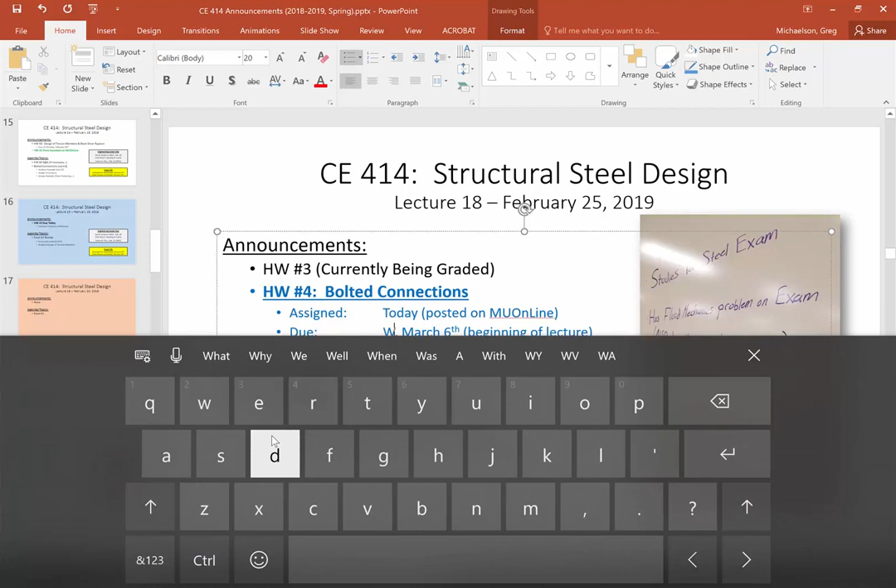Is it not? Did I do it again? It's more, is it a Wednesday? I'm sorry. See, now I don't have my keyboard hooked up, so now I got to do this thing. Okay, and I know that some of it fed through. See, I go in and I just change the date, but then it says Wednesday. Maybe I should just remove the day so that I'm not causing too many errors. But it is due on March 6th, so that is true.

Okay, so you all have a homework assignment, homework number 4, bolted connections. That's been uploaded today, it's due on March the 6th. After today, you should be able to handle most of it. The only thing that's going to be a little new is the combined loading problem. But if we don't get to it today, we're definitely going to get to it Wednesday. There's no reason you can't address number 1 and probably number 2. There are 3 problems, and number 1 and number 2 you should definitely be able to address by the end of business today. So yeah, everybody good?

What? Oh, thank you, I didn't know what you were talking about. Okay, thank you, that's awesome.

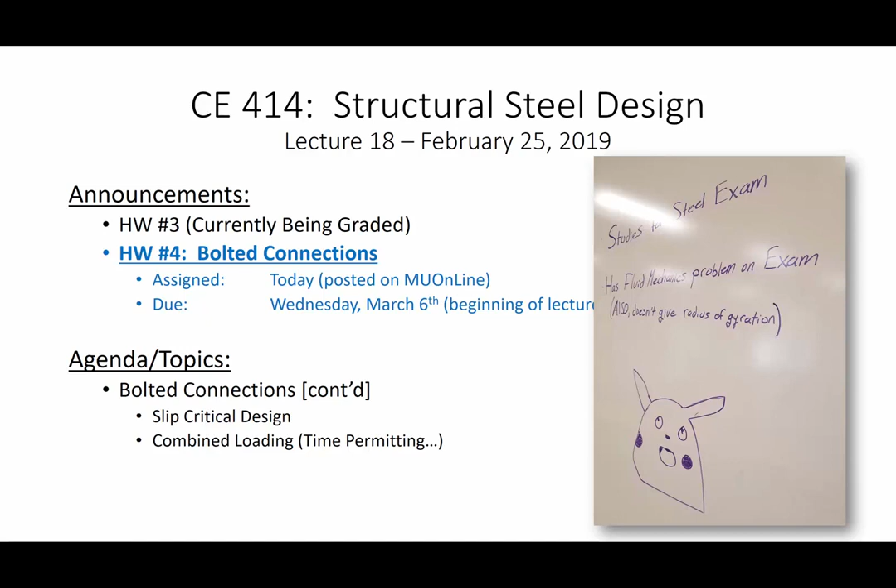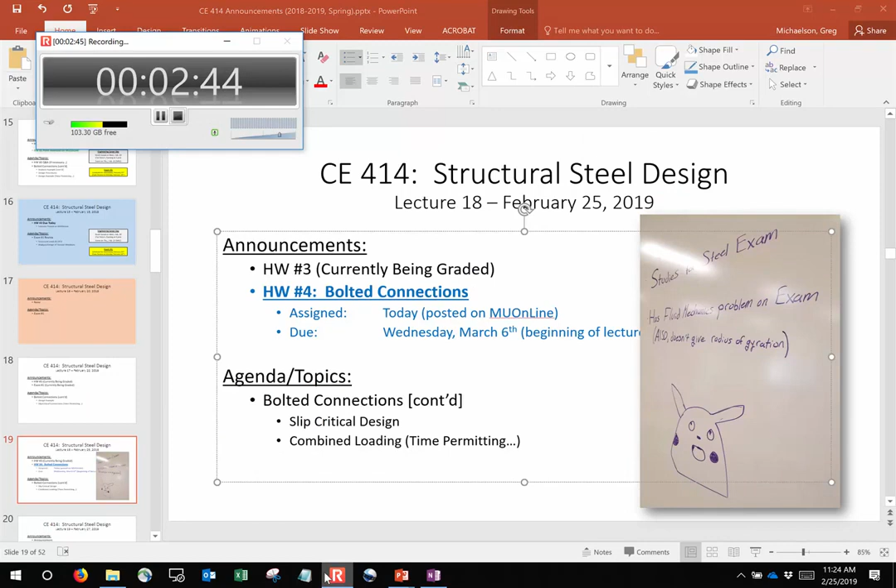So let's go back to bolted connections, and let's get back into the swing of things. Is this thing still recording? Yes, it is. I was like, why is it only recording for 2 minutes? Oh yeah, because I didn't record any of the exam solution.

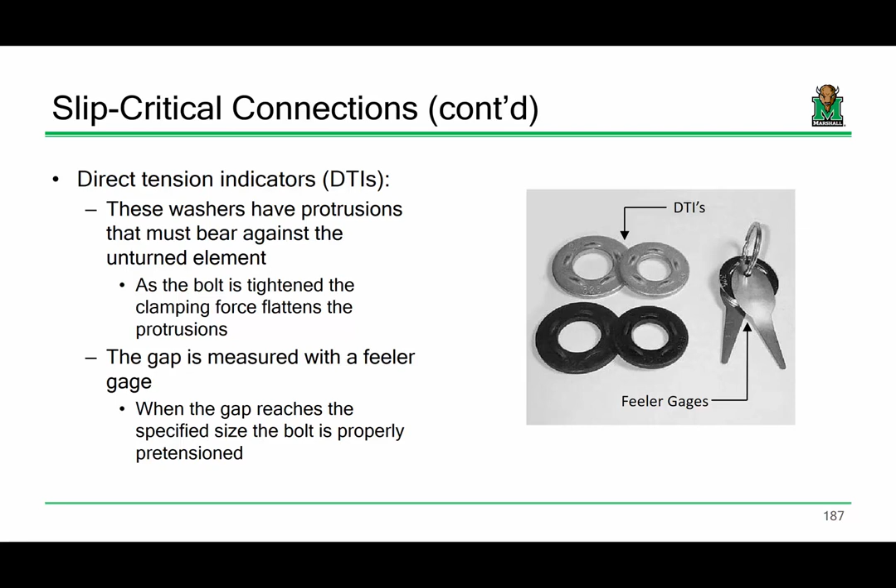All right, let me go back a few slides to make sure everybody's clear on this. So the last thing we talked about was the difference between a bearing type connection and a slip critical connection. A bearing type connection is subjected to the requirements of bolt shear capacity, or it must meet the requirements of bolt shear and bolt bearing. So if you have load on it, those are the 2 limit states that you need to withstand, and that ultimately guides how you design. We determine the design load, determine the shear capacity of a single bolt, divide to obtain the number of bolts, lay it out according to spacing and edge distance requirements, and then check bolt bearing. Now, let's be absolutely clear, I'm not going to make you check gross section yielding, net section fracture, block shear rupture, any of that, although theoretically, whenever you're designing a connection in tension, there are all those other limit states you need to check.

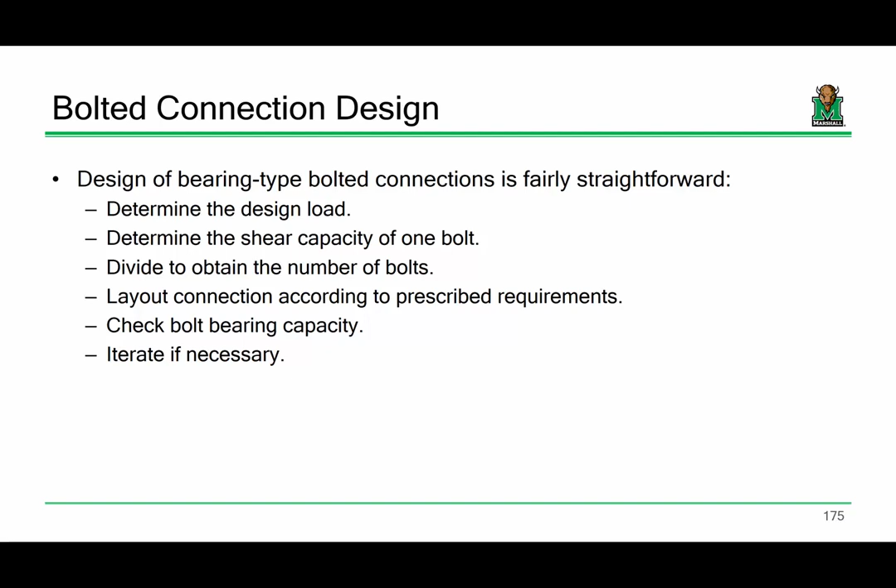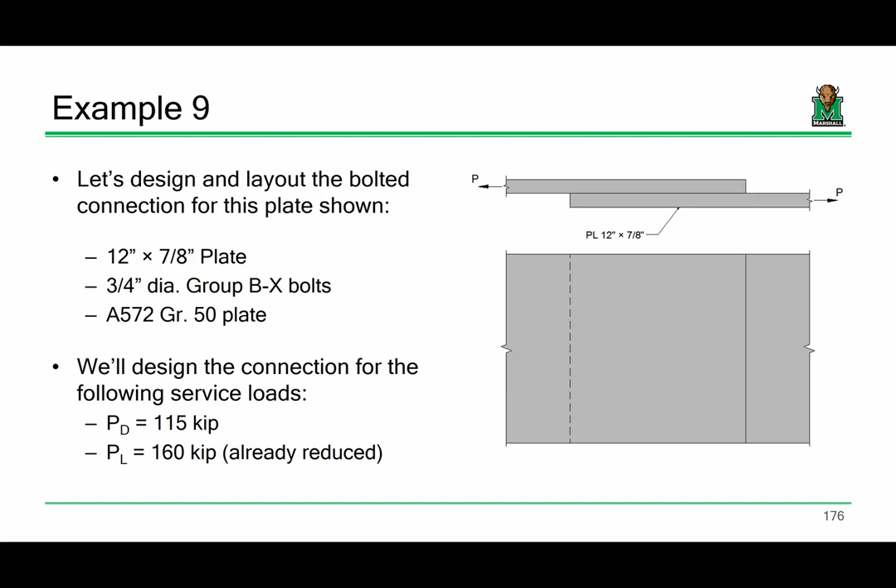We did this problem together, and I think we got, what was it, like 18? How many bolts? Was it 18 bolts? 15 bolts. Okay, so we got 15 bolts on this connection. We laid it out in a 5x3 pattern, used 2-inch spacing along the plate and 1-inch edge distance spacing. Yeah, it was 2 and 1. We didn't do the bolt bearing check, but you all have enough ammunition to do that on your own.

And we talked about additional issues, and then we got into slip critical land. Slip critical connections are when we're using enough pre-tension on the bolts that we can actually count on the friction developed between the 2 faying surfaces for the strength of the connection. There are specific locations where we do that, where we have vibratory loads, where we have fatigue considerations, and it's not uncommon to detail connections that way in earthquake zones. So all bridges use slip critical connections, so it's a very fundamental type of bolted connection.

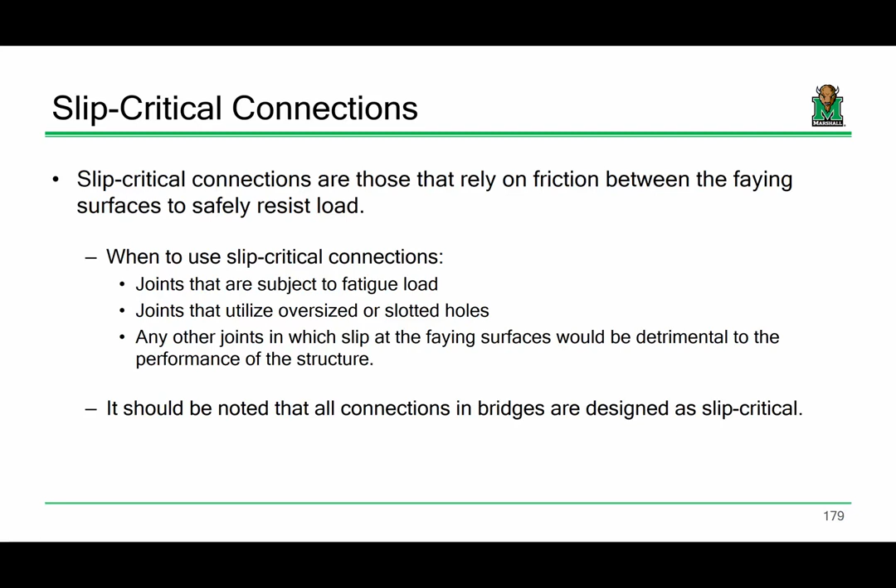Slip critical connections have to meet the requirements of bolt shear, bolt bearing, and this new slip resistance. We went through all these different ways in which you can achieve a slip critical connection. I'm not going to go through all of them again since we've done it before.

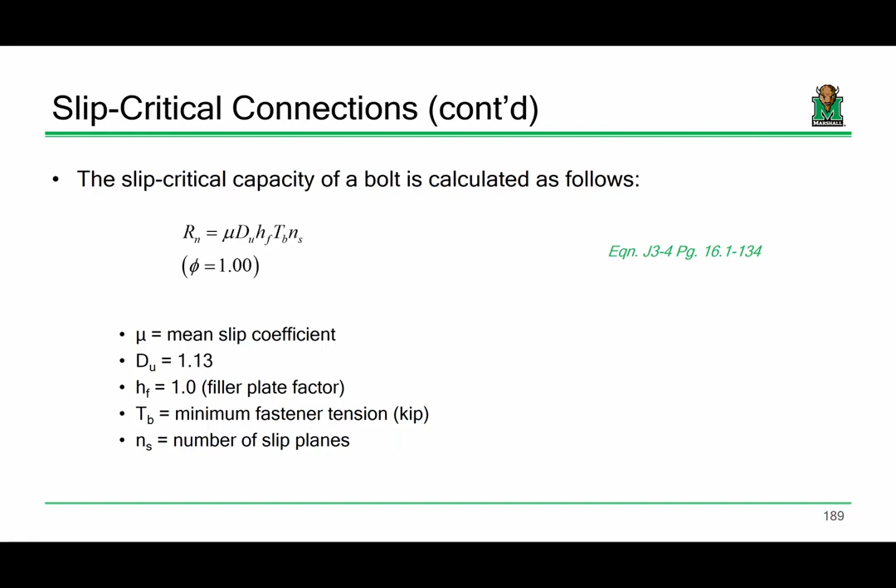You take mu and you multiply it by T sub B. T sub B is essentially your normal force, that's how much tension you're developing inside your bolt. So mu times T sub B, that's the physics side of it. The D sub U, the H sub F, and all that, those are all the adjustments for reality.

So mu, that's a lookup, 0.3 for Class A, 0.5 for Class B. The difference between the two is basically a reflection of the surface characteristics. If you have blast clean steel, you develop better friction between the two plates, whereas normal everyday steel, a mu of 0.3 is expected.

D sub U is that multiplier that reflects the actual pretension you get versus what you specify. On average, you get more pretension in the field than what you actually specify, so it should give you some comfort that those prescribed methods like turn of the nut and using a DTI or twist-off control bolts are all very valid means to generate specified pretension, because you usually get that and then some, since that value is over 1.

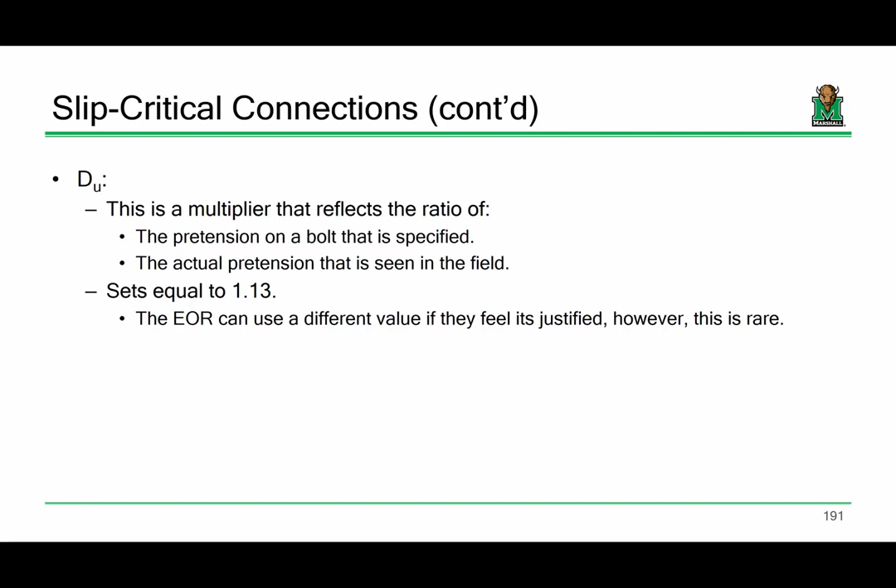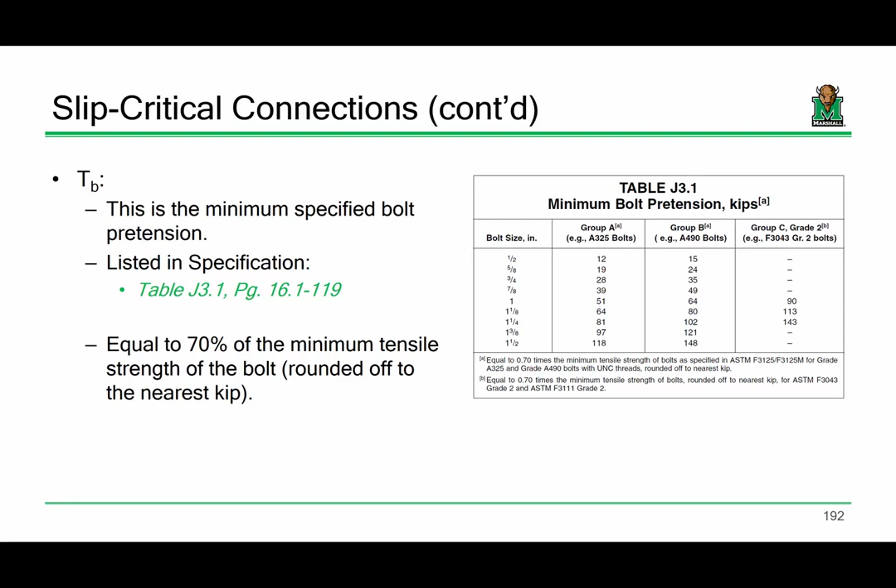The engineer of record can specify a different value if they want, but that almost always never happens. T sub B, that's the actual minimum pretension force that you get. It's roughly equal to about 70% of the minimum tensile strength of the bolt, just rounded off to the nearest kip.

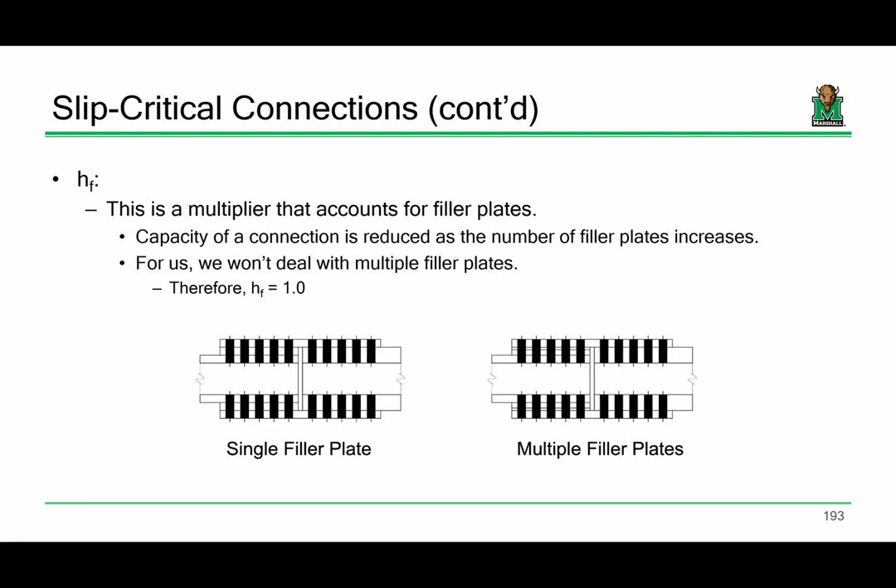The filler plate factor, that's if you're splicing beam A to beam B and you have multiple filler plates to try and even out that thickness. But we never really have to worry about that for the purposes of what we're doing in this course. And N sub S, that's just the number of slip planes. If you had multiple slip planes, you could double your capacity, but it's basically the same thing as the number of shear planes - the number of faying surfaces, or the number of locations where you can develop that slip capacity.

The big thing I want everybody to be clear about is that all of these parameters, just like bolt shear capacity, are in here. So if you turn to Table 7-1, that's the table that lists the capacity of each bolt, right? Because everybody brought their AISC 15th edition steel construction manual, that turquoise book I see on everybody's desk.

Yeah. Oh, there we go, there we go. I didn't know you were looking for it. Never mind, I apologize.

Everybody has their AISC 15th edition steel construction manual, right? So if you turn to table 7.1, it lists the shear capacity, available shear strength of a bolt. Just turn the page, and you'll see table 7.3, which has the slip critical capacity.

Now, if you look at how this is organized, the page on the left is group A bolts, the page on the right is group B bolts. Now, you can turn the page and there's a group C bolt, but we're never going to use group C in this course, so you don't have to worry about that.

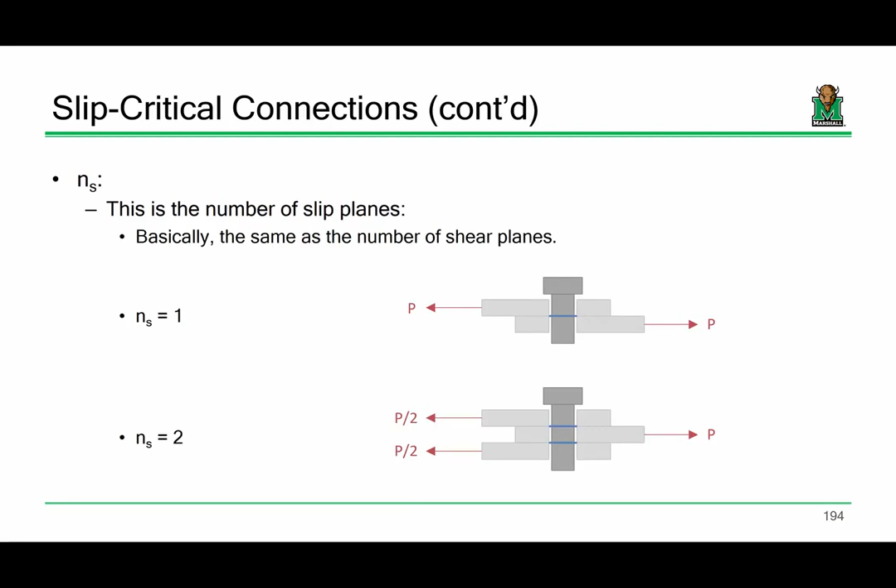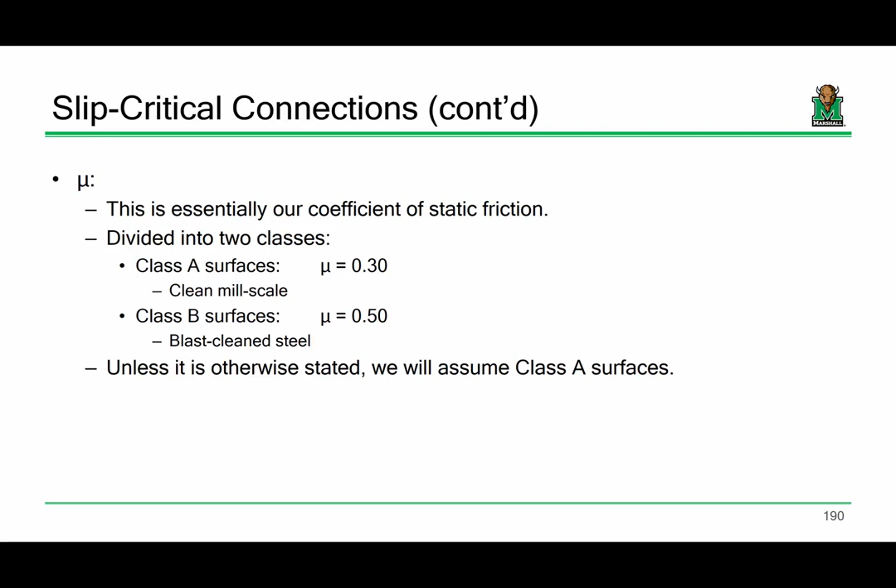Basically, larger hole diameters mean you develop less friction, so less friction means a weaker bolt. You can see that pattern if you look at the bolt holes—as the bolt holes get bigger, the bolt capacities get smaller.

But you really don't have to do much in terms of capacity calculation. It's very similar to bolt shear—all you have to do is say here's my bolt diameter, I'm looking at a Group A bolt, it's 3/4 inch in diameter, it's single shear, and bam, there's my capacity. It's a pretty straightforward lookup—there's really not a whole lot to it.

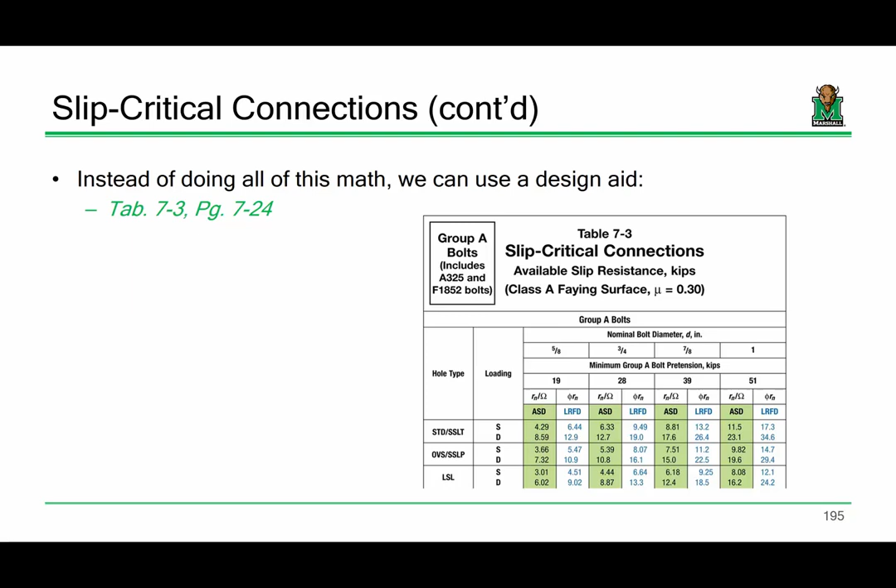I want to exercise that using the following example. I want to design this connection, but I'm not going to go full out into it because this example is going to be really short. Now, to be absolutely clear, it would probably be a lot longer on your homework assignment since you'd have to look at your bolt layout requirements, edge distance requirements, and spacing. I'm not going to get into all that. I just want to make sure you're comfortable looking up the value here—that's really all this example is about.

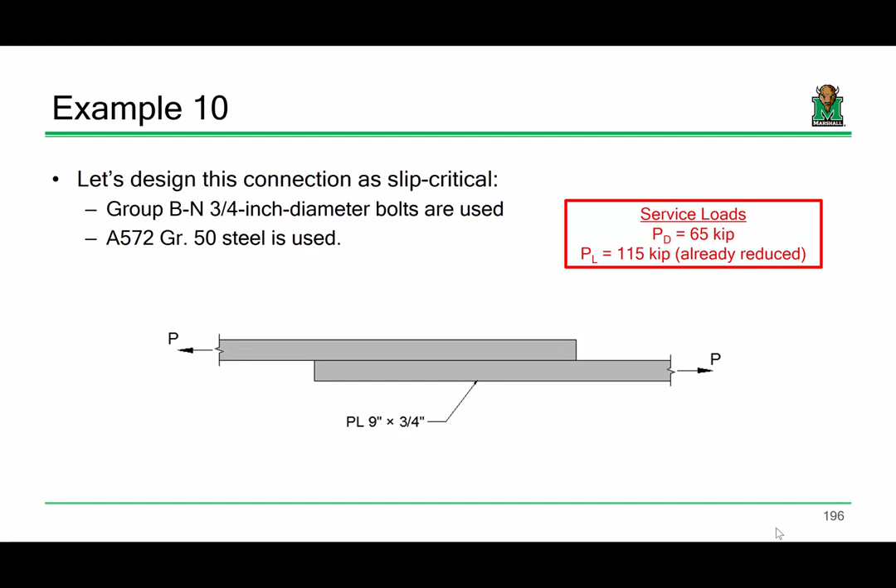So we have a Group B 3/4 inch diameter bolt with A572 grade 50, although that's really not going to matter for the purposes of what we're talking about here. What we need to do is determine how many bolts we're going to use. I'll show you something about this example as we get into it, and I think you'll see what I mean.

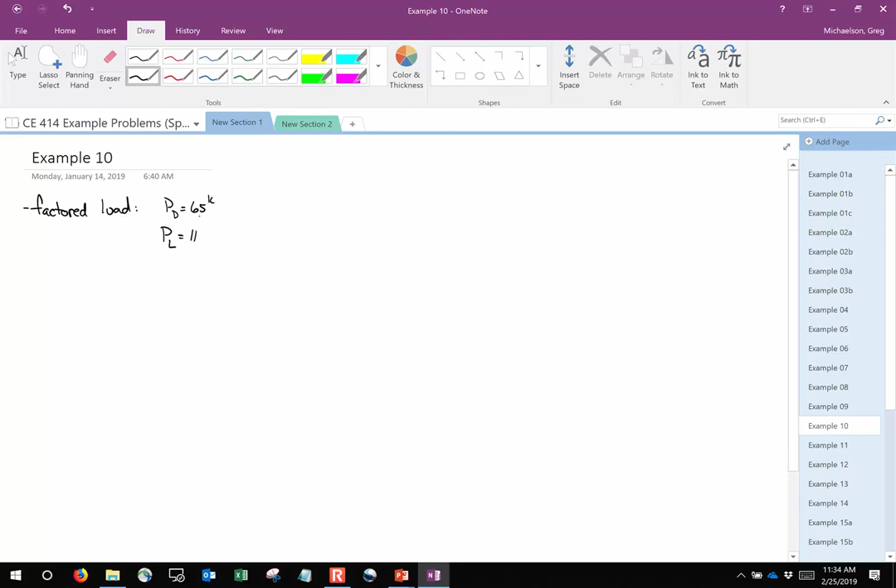Okay, so first off, if we're in design land, what do you think is the first step we need to do? We need to factor the load—so let's determine a factored load. We have a dead load of 65 kips and a live load of 115. So that's 1.2 dead plus 1.6 live.

All right, hold on. 262 kips—do I have a second on that? Somebody said no? Okay, yeah, well, it's possible. Remember, I can't stress this enough—on an exam, second-guess yourself. Do the math, and do it again. Guarantee you, averages will go up. Guaranteed.

All right, now in terms of design, here's sort of how this works. The first thing I'm going to do is look up bolt shear capacity. Just because this is a slip-critical connection does not mean we don't have to worry about bolt shear—we most certainly do. See, if the slip fails, the connection automatically becomes a bolt bearing connection, because if that friction fails, those bolts engage, and so we still have to meet the requirements of bolt shear and bolt bearing.

So let's talk about these bolts. What's the deal with the group—is it Group A or Group B? So it's Group B—and then is it excluded or included? If I didn't tell you whether it was included or excluded, what would you do? Assume they're included, because threads included inside the shear plane mean a weaker connection. Always assume the worst case scenario.

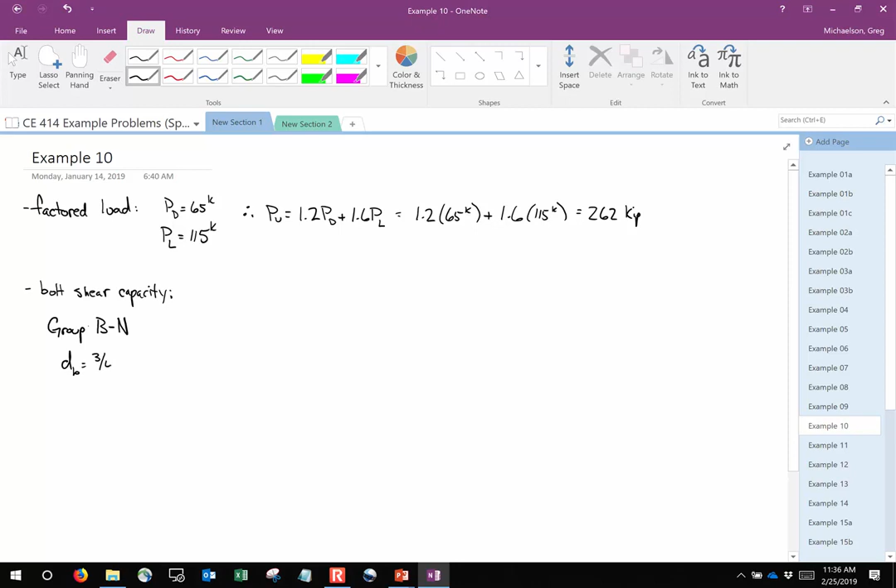What is the bolt diameter? And what about the shear—are we in a single shear scenario or a double shear scenario? Single shear. So help me out: if we're talking about the shear capacity of a bolt, I'll indicate that as phi Rn V, with a little V to indicate shear. What would the shear capacity of a bolt be? 22.5 kips per bolt. Is everybody else able to find that?

Well, somebody, where did you find that? Somebody tell me.

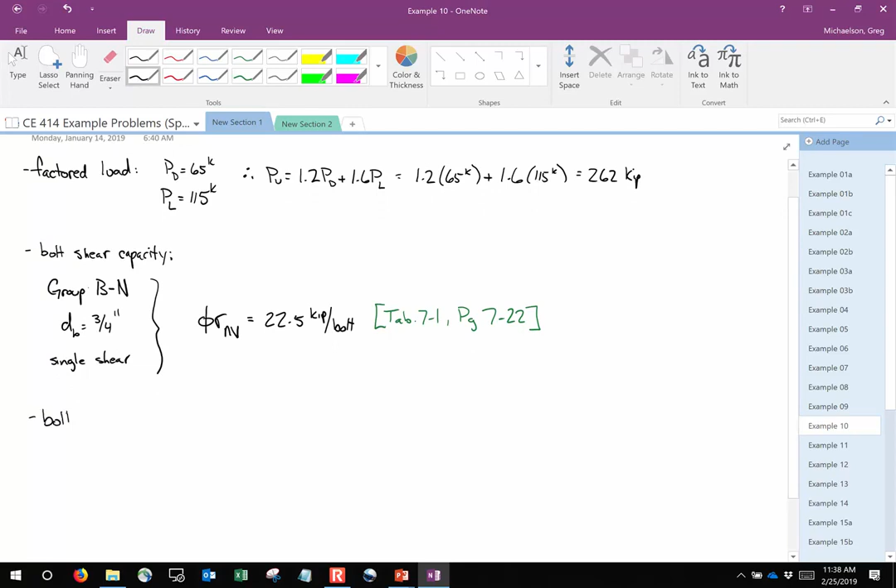Okay, let's start listing the parameters associated with bolt slip that are going to be important. We can turn to table 7-3 and start writing down the things that matter. So first off, what's the deal with the groups? Are we in group A or group B? B, so we have group B.

What about the threads being included? Does that matter? It doesn't matter, okay, because we're not talking about shear, we're talking about slip. So whether the threads are going to be sheared through or not doesn't matter if we're not talking about shear.

Now, we do still have a bolt diameter of 3/4 of an inch, okay. We're dealing with a standard hole. I'll go ahead and put that, although we pretty much are always going to be dealing with a standard hole.

What about our faying surface? Do we know what faying surface we have for this problem? We don't. So if you don't know, what are you going to do? What's the most conservative assumption? Well, no, that's the bolt group. Yes, so we're always going to assume—so maybe what I'll do is put that in red and say: assume class A.

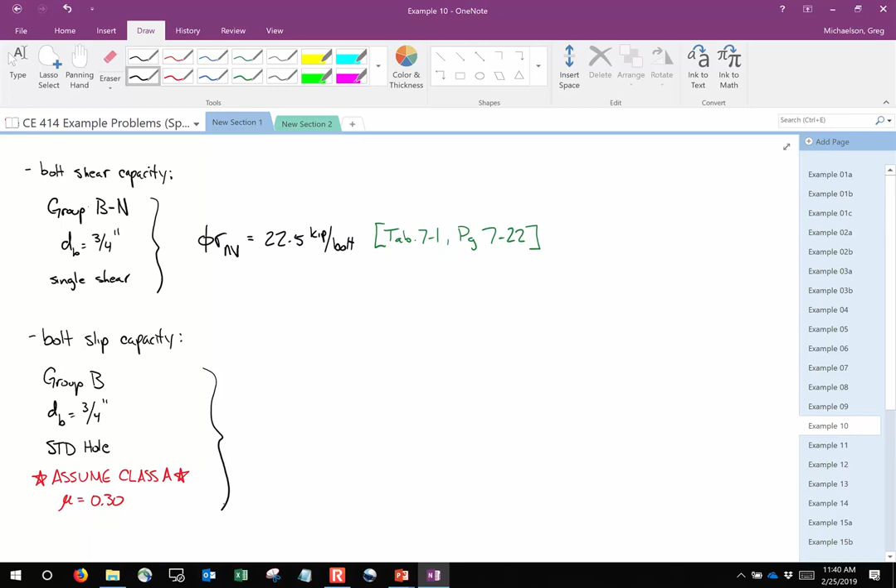It'd be like if I didn't tell you whether or not the threads were included—always assume, same deal here. So if I have a bolt that is 3/4 inches in diameter, it's group B. Oh, hold on, there's one more thing—is this single slip or double slip?

So what would the phi—what I'll do is I'll write this. I'll say phi Rn, we'll say SC. What is that going to be? 11.9. So we'll say that's from table 7-3, page 7-25. Now, is everybody else able to find that?

Did it specify what the pretension was? Why did we use that under... I don't—oh, that's a good question. That value is associated with that bolt diameter. So the 35 kips that you see right there, that's T sub b for that bolt. So if you want, you could take 35 kips times 0.3 as your mu value, times 1.13, times all this, and compute these values. But I'm lazy, I'm just going to use a table.

Is everybody okay with this? So which is weaker, the shear capacity or the slip capacity? If I load this bolt, do you think it's going to fail and slip first, or fail and shear first? Slip. Okay. Now, we don't like to use the terms always and never, but more often than not, this tends to happen. It's not always the case, but more often than not, a lot of times with most regular scenarios, the slip capacity is about half the shear capacity.

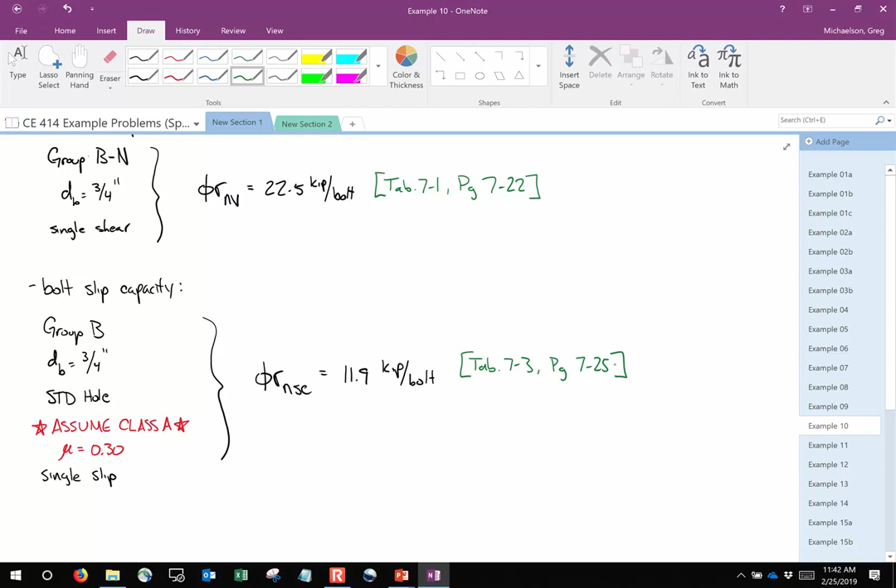So if you're designing a connection and you suddenly decide it's going to be slip critical, you're probably going to do something like double the amount of bolts, and that's sort of a rule of thumb there. Now, if you want to determine how many bolts you would need, it's pretty straightforward—we're going to design based off of the slip capacity. So PU was what, was it 262?

So help me out, how many bolts are we going to need, theoretically? What's the theoretical value going to be? I have 262 kips on the connection, each bolt can hold 11.9 kips, how many bolts am I going to need? 22? Well, what's the number come out to be? 22.02. Say it again. 22.02.

Yeah, I mean, I'll be honest, in a scenario like this I might be tempted to use 22 bolts because it's so close. But in all honesty, if we're being conservative with our designs, we probably would need to round that up. And I probably wouldn't round it up to 23 bolts because arranging 23 bolts in a nice, neat, organized pattern would be kind of difficult. So I'd probably say something like use 24.

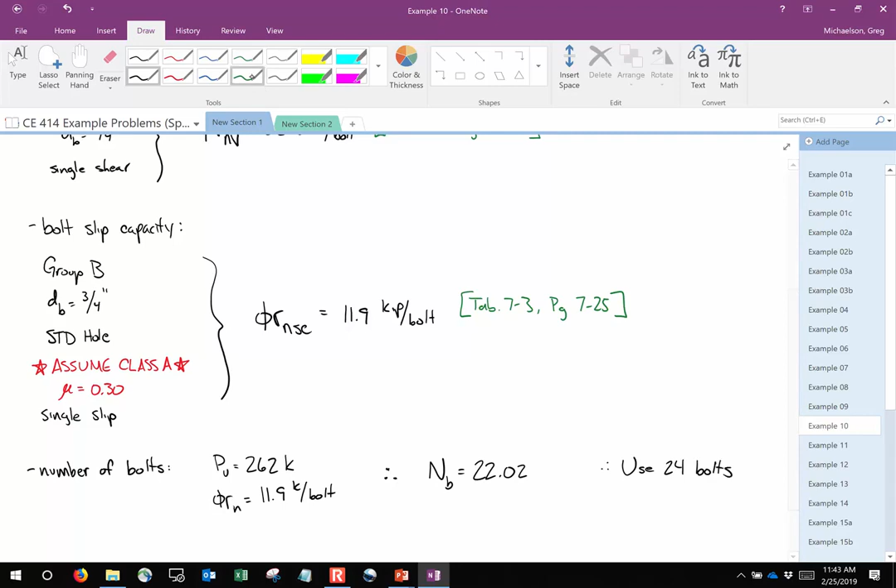Now, the remaining steps—because I'm not going to do it, we've already done this before and it's literally just the same thing over and over again—lay out the connection, check bolt bearing, and if necessary, check tension member limit states.

Let me ask you a question. Yes. Just like you don't really need it for shear because everything's tabulated—so, but I do want you to understand it. So, yes.

Yeah, I would. Short answer, yeah. But also on the homework assignment, I think I go a little bit further and I'll say things like assuming 3 lines of bolts. So if there's going to be 3 lines, it's going to be 3, 6, 9, 12, 15, 18, so I give you a little more guidance there. Yep. You could, yeah, you could.

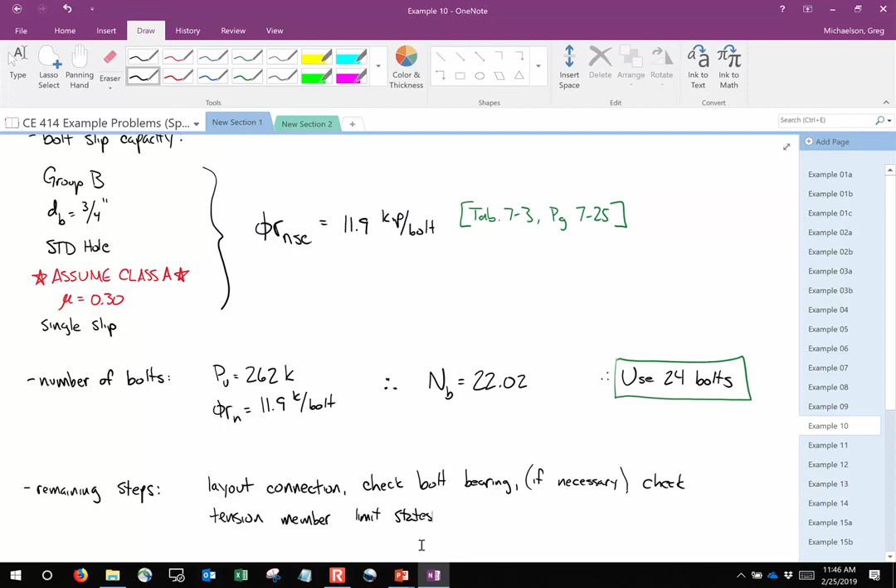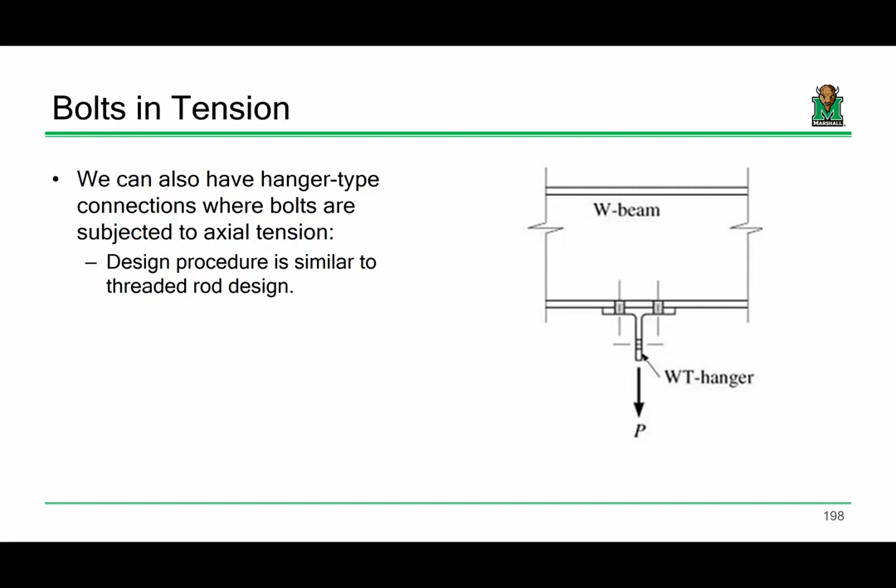Fortunately, the design of a series of bolts like this is really no more difficult - in some cases it's easier than the design of bolts in shear. It's the same idea: determine the capacity of a bolt, divide to get the total number of bolts. The capacity is different because we're talking about tensile capacities, not shear capacities, but theoretically it's easier. We don't care how many threads are included in the shear plane because we're not shearing it, we're yanking on it. It also doesn't matter how many shear planes there are - there could be 86 shear planes and we're still just yanking on it.

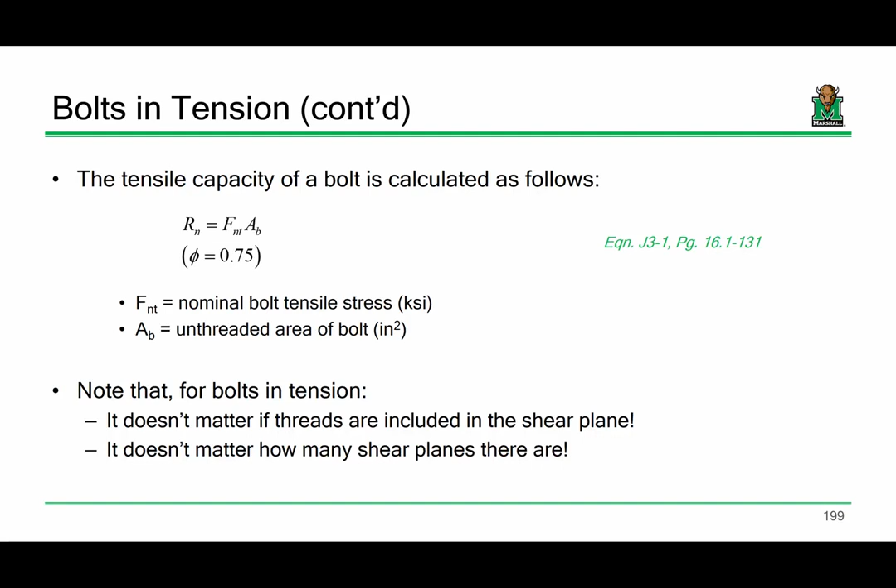In fact, this equation is the exact same equation for threaded rod design. It's no different. If you go to table 7-1, that's the shear capacity. Literally, the table next to it gives you the tensile capacity. Really easy to determine.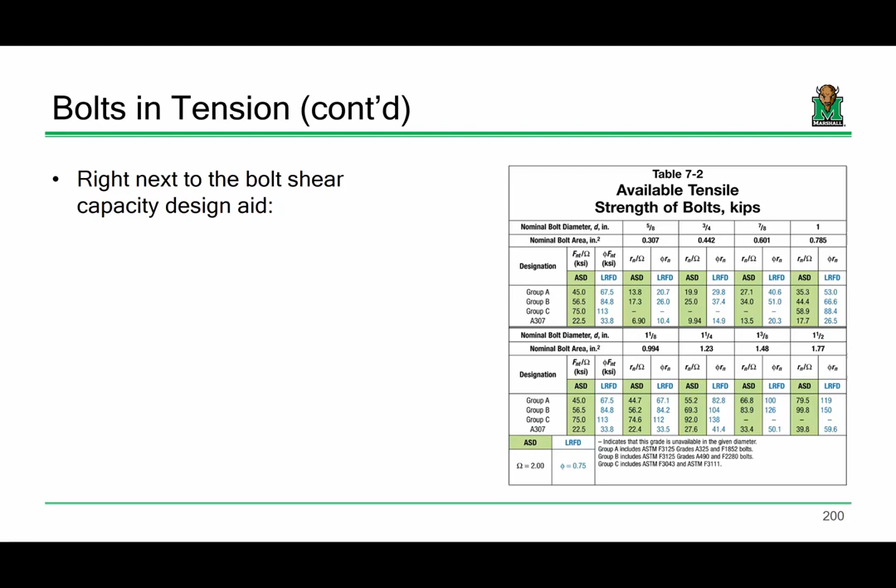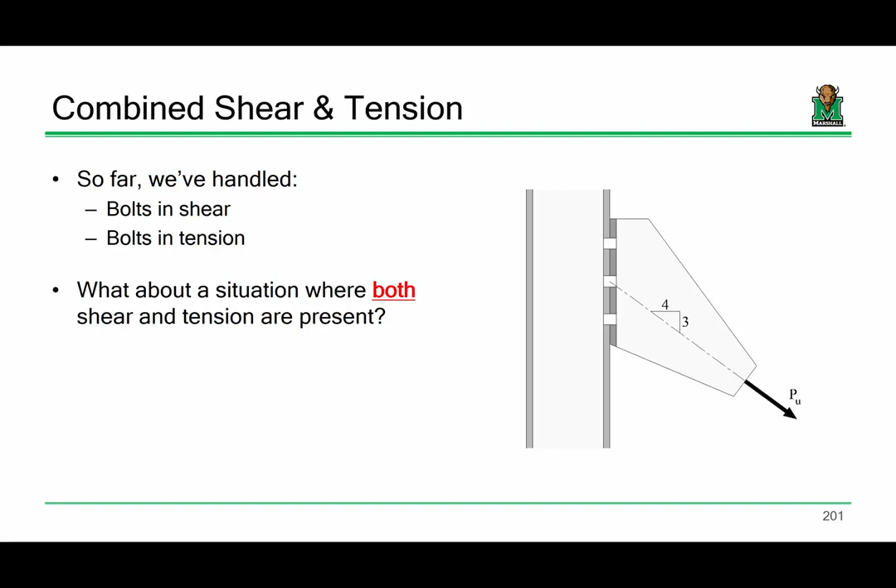So how do you determine the capacity of a bolt that is seeing both tension and shear? That's a little tricky. That's a fair way of looking at it, and we do kind of do that, but what we also have to address is the interaction between the two forces. Here's what I mean by that.

If you have a combination of shear and tension on the bolt, you have to assess three checks: the capacity of the bolt in shear, the capacity of the bolt in tension, and how those two forces interact with one another. That's what we're talking about with interaction.

For those of you who've already had concrete design, you've already seen interaction before. Remember at the very end of class when we had the PM curves? You had an element that was seeing both axial load and bending, and so you couldn't do 100% of the axial load and 100% of the bending. You had to use those beam charts, or beam column charts, those PM curves, to figure out what our capacity was going to be.

We're going to have something a little bit more simple and straightforward here, but I really wanted to introduce this concept because it's really important for what we're talking about. We're going to talk about the math in significant detail next time. That's all I got.